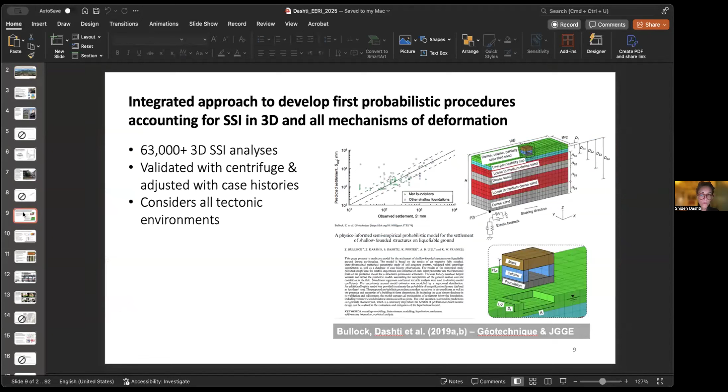Interesting, because when we tried it, it worked. Yeah, it seems it's an issue of the computer because it appears in presentation mode for a second and then goes back automatically. Is it the same right now? Yes, I think it's the same. But we can go like that. I think it shows in a good size as it is. Okay, so for me it's presentation mode. It's better for you to get out of presentation mode so that we see the same as you. Okay, so then that's going to be a problem because some of them are animated. Do you see things moving? No. Oh, wow. Okay.

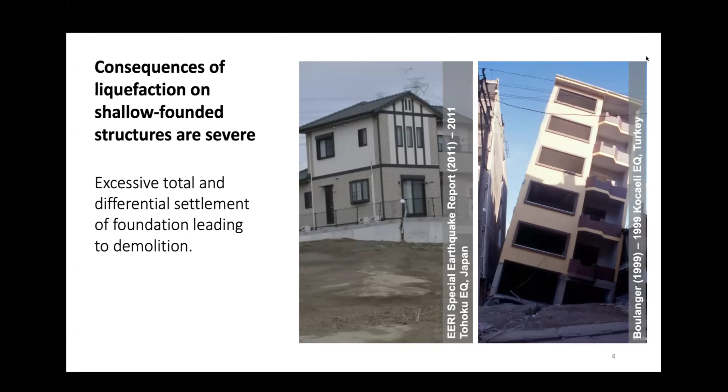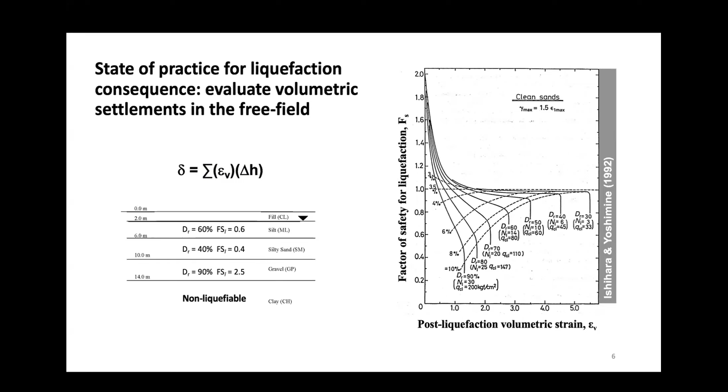Well, previous earthquakes have provided many examples of the damaging effects of soil liquefaction on the built environment, in particular in terms of excessive settlement or rotation of buildings on shallow foundations. The current state of practice for estimating the settlement of structures still relies heavily on empirical procedures that estimate volumetric deformations in individual layers and ignore the presence of the structure altogether. And they add up essentially the volumetric strains in different layers to get the final total surface settlement, ignoring the mechanisms that really exist below the structure under the influence of seismic soil structure interaction.

Next slide, please. So previous earthquakes have provided many examples of how these empirical volumetric strain-based procedures are unreliable and unconservative when estimating the settlement of the foundation, because they ignore seismic soil structure interaction and the mechanisms of deformation that are active below the foundation compared to the soil in the free field.

Next slide, please. And as a result, to address some of these gaps associated with building performance on liquefied soils, we in our team have developed the first probabilistic procedures for estimating both settlement and tilt or differential settlement, considering soil structure interaction or SSI in 3 dimensions, and all the mechanisms of deformation that are active, based on 63,000 3-dimensional soil structure interaction analyses. These analyses have been validated with centrifuge experiments and adjusted based on case histories, and they consider all the tectonic environments when combined with our ground motion prediction equations, which is a significant improvement to the previous procedures that were only considering free field conditions that I showed earlier.

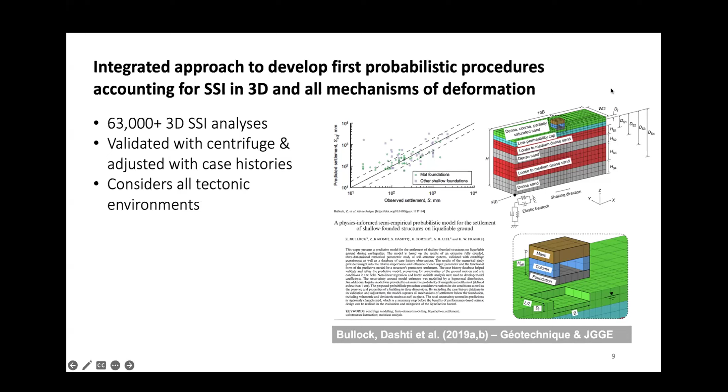Next slide, please. Now, these procedures have recently been extended to include triggering and mitigation as well. Next, considering new measures of demand and resistance, for example, cumulative absolute velocity, instead of surface PGA, that is mechanics-based and accounts for the degree of softening that we are interested in within the deposit.

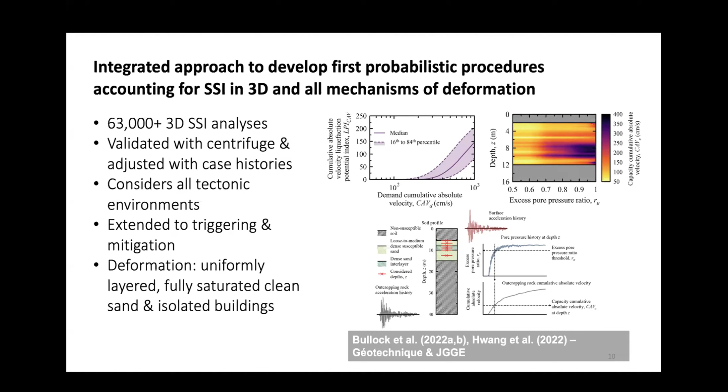Next, please. But there is one caveat to all of these procedures, and that is that they generally assume that we are dealing with uniformly layered, fully saturated deposits of clean sand, and that the buildings are essentially isolated. Next, please. So there are problems with both of these assumptions.

First, these analyses typically assume an idealized soil profile, like I've shown at the top right corner of the slide, which is really a big gross simplification of the reality, which is the bottom of the slide. That's what the actual soil profiles usually look like. Natural soil deposits are often highly stratified, and that stratification affects the extent and distribution of pore pressures and strains.

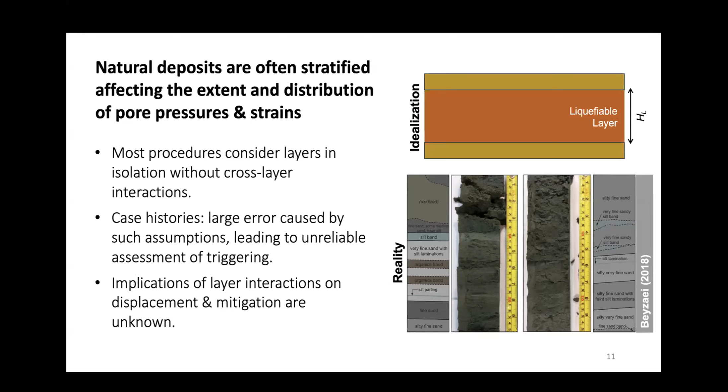And nevertheless, most of the procedures that we have available for liquefaction consider layers in isolation without accounting for cross-layer interactions, even though case histories, for example, after Christchurch in New Zealand, have shown a significant amount of error in our estimation of liquefaction triggering when we don't consider cross-layer interactions in stratigraphically variable deposits. But we don't know the implications of this problem in our procedures in terms of displacements or in terms of effectiveness of mitigation strategies. Next, please.

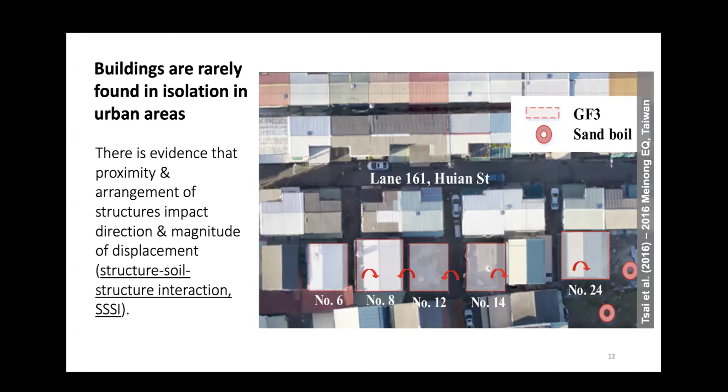On the second assumption, I mentioned our procedures, which are an important improvement to what we had before. They still assume that buildings are essentially isolated. But in reality, especially in urban areas, buildings are rarely found in isolation. We know, and there is plenty of evidence from case histories, that proximity and arrangement of structures impact the direction and magnitude of the displacement of the foundation due to what we refer to as structure-soil-structure interaction, or SSSI. Next, please.

Now, even though there is plenty of evidence that SSSI has a significant influence on the response, this problem hasn't been sufficiently studied on liquefiable soils, and therefore our existing procedures for liquefaction, for the most part, actually ignore SSSI, and definitely coupling between buildings is not considered in most of our design standards. Next.

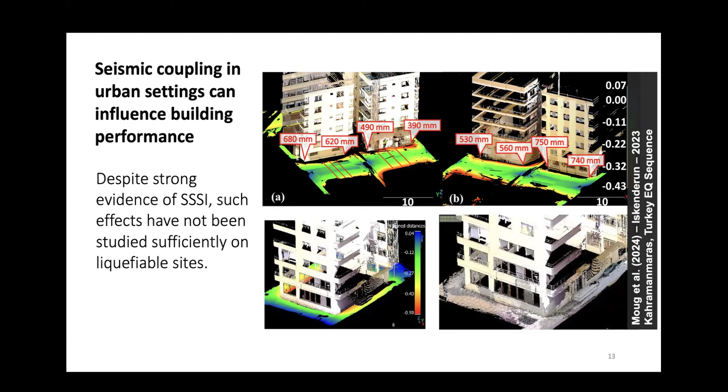So the last thing I want to mention about gaps is that we live in a changing climate, and that means more intense and more frequent climatic hazards like floods, wildfire, drought, and these extreme events cause fluctuations in the temperature, moisture, and flow. They affect the state of stress in our soils, and they therefore affect dynamic soil properties due to soil-atmosphere interactions.

And nevertheless, the impact of these fluctuations on soil liquefaction susceptibility, triggering, or consequence is understudied, especially in soils that are variable in their degree of saturation, and where these fluctuations can have a significant influence on the amount of suction, stress level, and dynamic properties. Next, please.

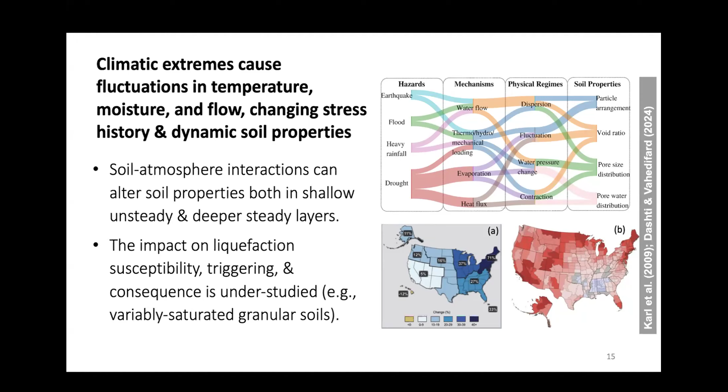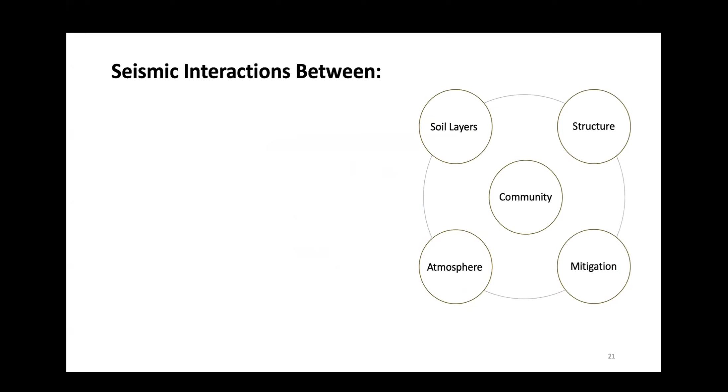So to address some of these problems, we use an integrated approach that includes field observations, physical modeling, constitutive modeling, and numerical modeling to study some of these interactions. Next slide, please. So I use this kind of integrated approach in our team to study interactions between soil layers and the structure, so that's soil-structure interaction, or between soil layers in stratigraphically variable deposits, or between structures through soil, or between mitigation strategy and the performance of the soil and structure system.

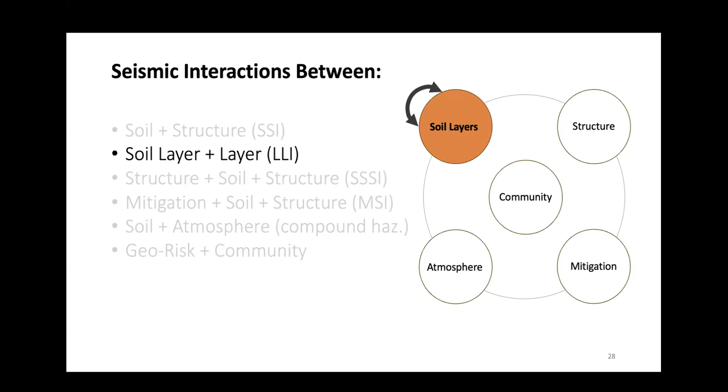We also study the interactions between soil layers and the atmosphere, for example, under compound climatic hazards, and the interaction among this whole system and their influence on various sectors of our community. In this presentation, I'm only going to focus on how different soil layers impact the performance of the structure, and how mitigation impacts the response of the system when we are dealing with realistically variable soil profiles with stratigraphic variability. Next.

Okay, next slide, please. So here is an outline of the presentation. I will first talk about the methodology, and then we'll take a small part of our simulations to look at how stratigraphic variability impacts the efficacy of liquefaction mitigation. And then we will talk about machine learning predictive models of performance.

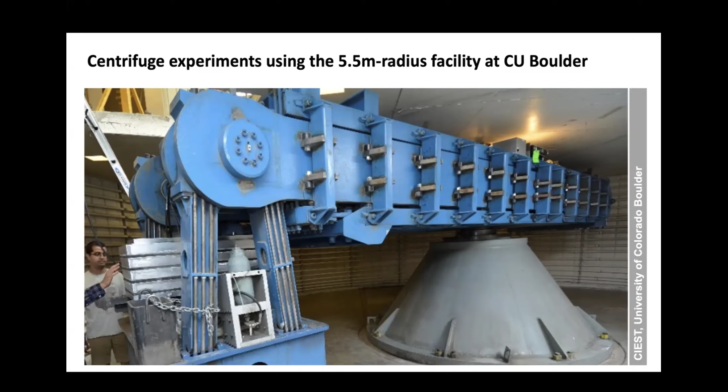Okay, so the next slide, we used the large centrifuge facility that we have available at the University of Colorado Boulder in the US, which has a radius of about 5.5 meters. And here we have the opportunity to build many models, scaled models of soil structure systems, and study this phenomenon physically with variations in the soil profile, structure, and ground motion so that we can calibrate and validate our numerical models accordingly. Next slide.

So we performed a large number of experiments, but here I'm showing the schematic drawing of a few of them where we had a layered liquefiable soil profile. In the middle, typically a deposit of loose, clean sand. Sometimes we added a thin silt capping layer above that critical layer. In some of the tests, we had no structure, no mitigation. Sometimes we introduced a form of mitigation.

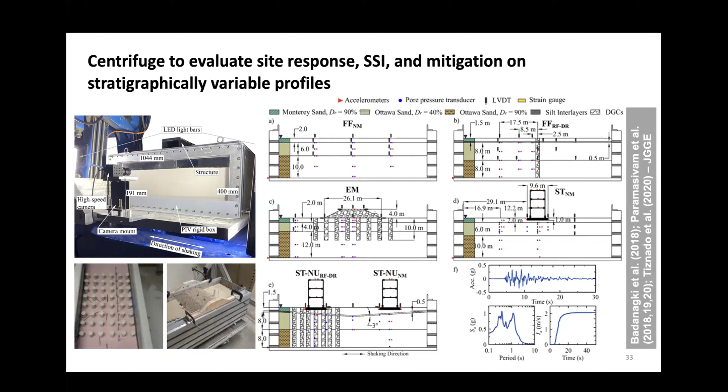Here in this slide, I'm only showing one form of mitigation, that is dense granular columns, or DGCs, which I will be using throughout the presentation for dense granular columns. And then some of the experiments had an isolated form of a building or a geotechnical structure like an embankment. Sometimes we also varied the thickness of the liquefiable layer to see the effects of that variation on the performance of the system. Next slide, please.

Here are pictures of two structures that were typically used in these experiments. Structure A, the shorter structure, represents a 3-story building, and building B represents a 9-story building on a 1-story basement foundation. And these structures were designed with inelastic fuses, so they are capable of inelastic deformations, damage, and collapse. But they were designed for different seismicity levels in the state of California in a shallow crustal earthquake tectonic environment.

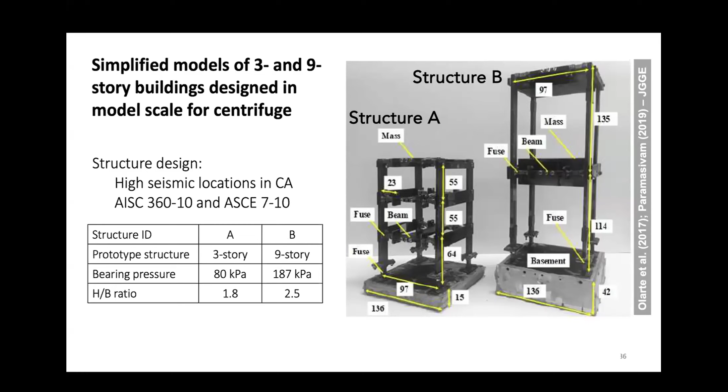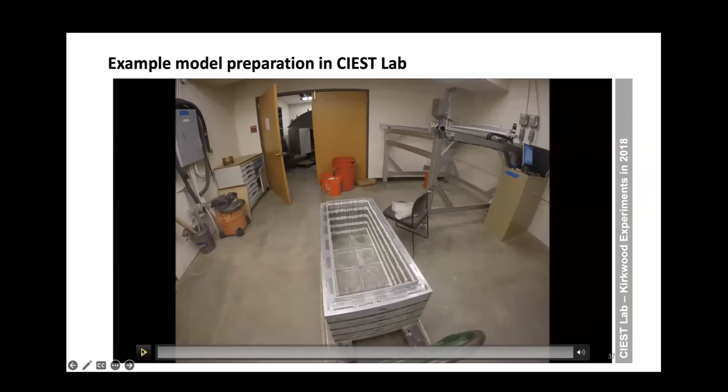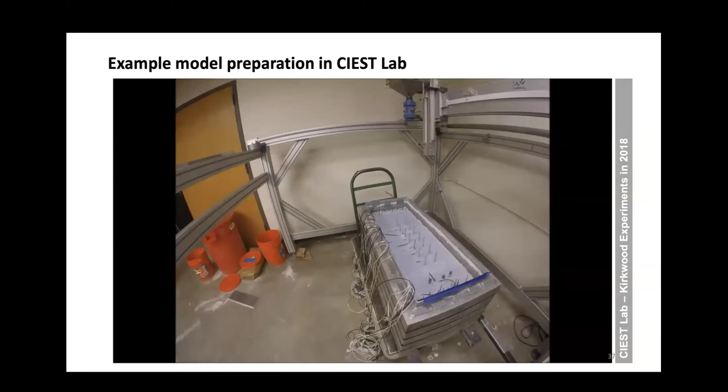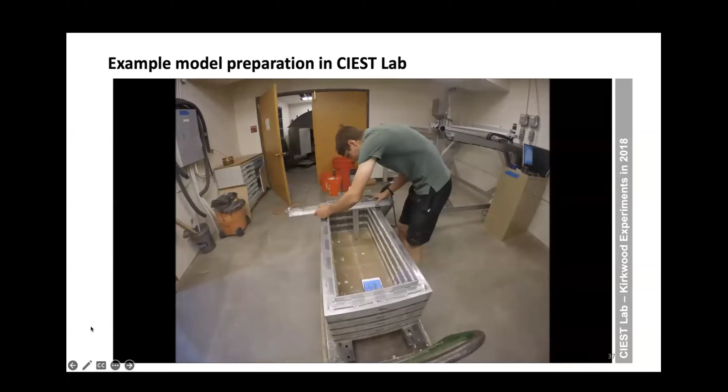Next slide, please. And here is a time-lapse video showing essentially how some of these model experiments were prepared. If the video plays, yeah, there's a time-lapse, so it goes really fast. It gives you an idea for the size of the container that was used in the centrifuge. We had an automated pluviator that was calibrated to achieve a certain relative density for dry pluviation of the sand layers in this case. Then we placed sensors at their designated locations and the structures, and then prepared the model to take it to the centrifuge, where the model was saturated and then spun up in the centrifuge, and then we applied the ground motion.

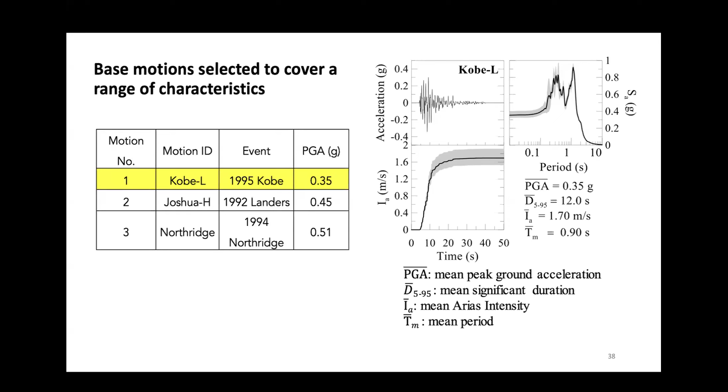Next slide, please. So in the next slide, I'm showing some of the properties of a sequence of ground motions. These properties are shown in prototype scale units, but in the centrifuge, in model scale, everything is different because of the scaling laws. Accelerations are, in this case, 75 times more, are scaled up in the centrifuge, and the time is scaled down. So everything is more intense and in a shorter duration in the centrifuge. But here I'm showing in prototype scale units one of the main acceleration demands as a horizontal component of a broadband signal during the Kobe earthquake at the Port Island station.

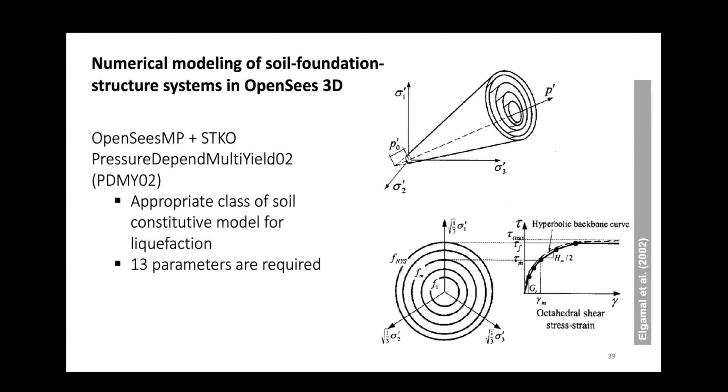Now, in parallel to the centrifuge experiments, we performed numerical simulations. We used 3 different types of constitutive models that are appropriate for capturing soil response when it liquefies. Here I'm showing only one of the models, a pressure-dependent multi-yield surface soil constitutive model. This model has many parameters that were calibrated. Next slide, please. Using a sequence of monotonic and cyclic triaxial tests that we performed in our lab. Next slide.

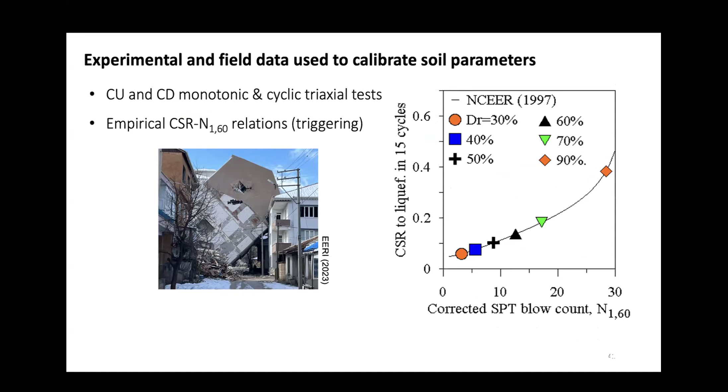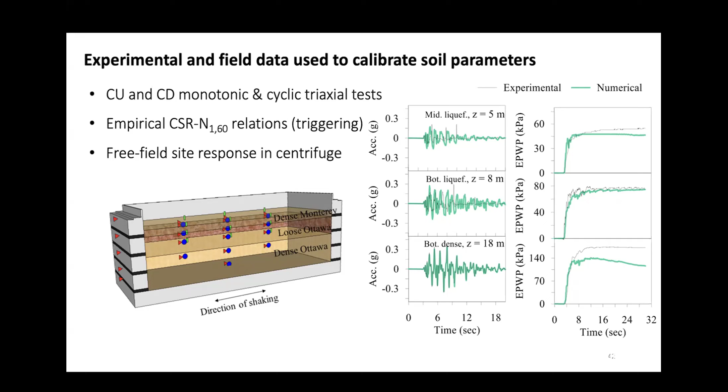In addition to empirical data on number of cycles to liquefaction, we also used one centrifuge experiment, next slide, where we had no building present and no mitigation, but we had a boundary value problem that could be used for calibrating the properties of our soil profiles under the expected confining pressures and drainage and the ground motion that we expected later in more complicated soil conditions. Then after calibration, we modeled the entire system, the soil foundation structure system, with or without mitigation.

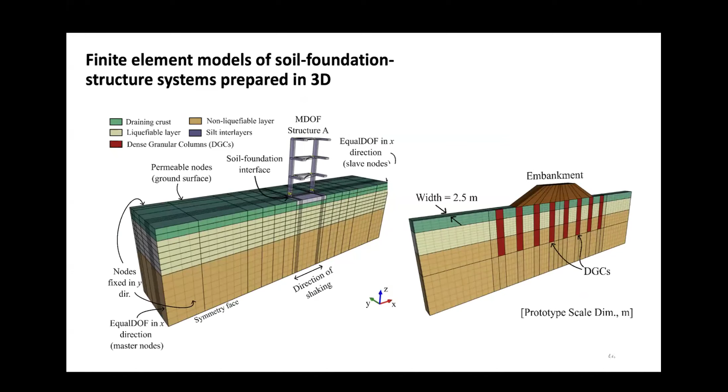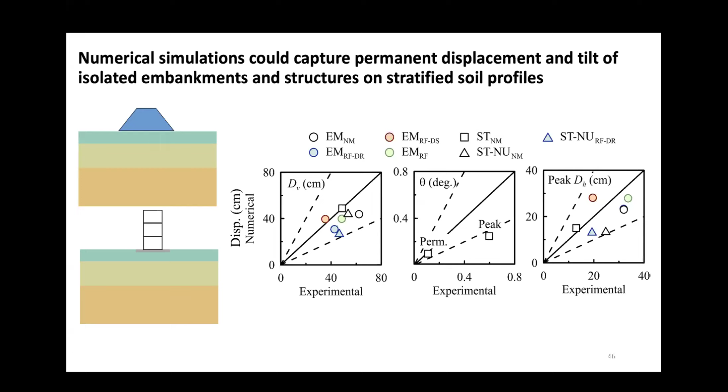Next slide. And we started to compare the results for our models with a structure or with an embankment, different kinds of mitigation or mitigation properties. And here in the next slide, I'm showing a summary of some of these comparisons in terms of vertical displacement or horizontal displacement and tilt. Overall, we were able to capture these trends well. In the next slide, there are more details in terms of the excess pore pressure time histories, settlement, tilt, or acceleration response spectra. There's not enough time to cover all of that, but it's in our publications, which I will cite at the end.

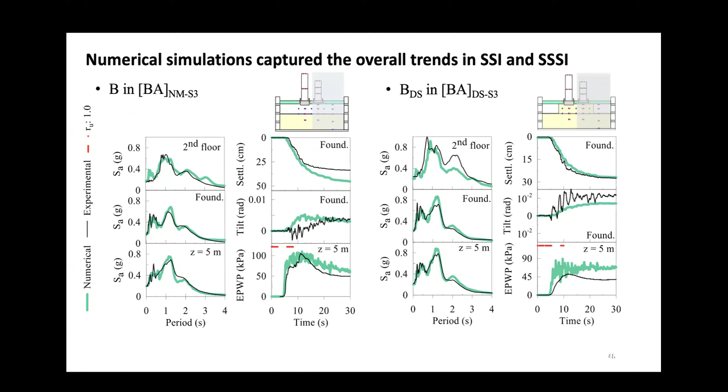All of these details are provided in the publications. Next slide, please. So after this initial exercise of understanding the mechanics and using the physical models to calibrate and validate our numerical tool, we took this numerical model and performed a limited sensitivity study to see how important is stratigraphic variability in terms of building performance on liquefiable soils and in terms of efficacy of mitigation.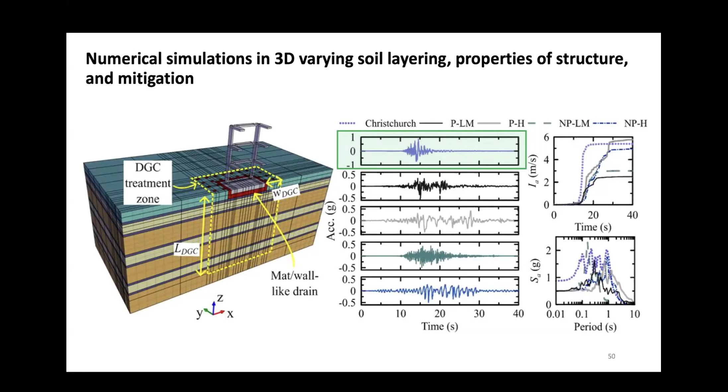So here I'm showing the results from this limited sensitivity study. That's just numerical models that were previously validated. I will only show the results for this one motion, just so that we can better see the trends. Now, in the next slide, I will show a few different soil models where we sequentially make the profile more complicated. So in model 1, on the left, we have a uniformly layered deposit of essentially clean sand.

The critical layer is in the middle. That's a loose, saturated, clean sand deposit, and it's sandwiched between two denser sand layers that are not going to liquefy, but they also don't introduce much of a variation in permeability. In the second model, we introduce one thin silt layer above that critical liquefiable layer. In the third model on the right, we introduce multiple silt interlayers. So that's essentially dividing up the continuity of the critical liquefiable layer.

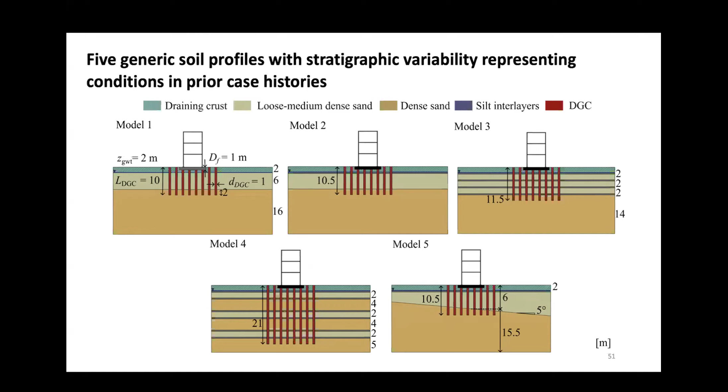In the fourth model, we take each of those critical layers and spread them out along the profile. In the fifth model, we vary the thickness of the critical layer. And all of these simulations were done with building A, that's the 3-story building on a mat foundation, and building B, that is a 9-story building on a basement foundation. And all of them run first with no mitigation, and then with DGCs or dense granular columns in different forms.

So these DGCs, we have the baseline case with an area replacement ratio of 10%. Then we look at the influence of area replacement ratio by increasing it to 20%. We vary the stiffness ratio. We look at the possibility of clogging. What if it doesn't drain? What is the effect on the system?

We also look at how densifying the soil around the DGCs, which could happen, depending on the soil type, depending on the energy of compaction of the DGCs during installation, we could get densification. How does that mechanism combined with drainage affect the performance? So we looked at these variations in our sensitivity study. Next slide.

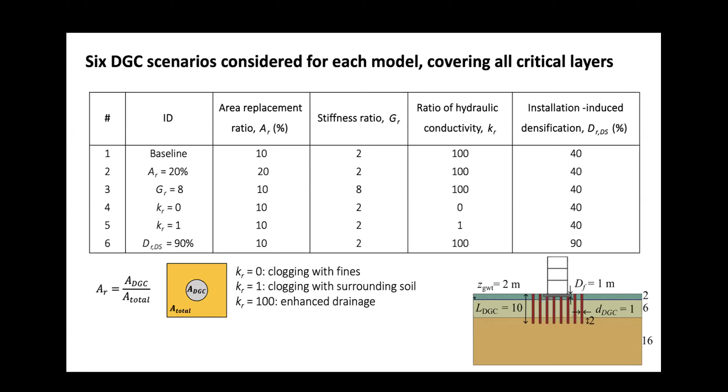And then now we can look at how for each of these profiles, the performance changed. And here I'm only, for the interest of time, showing performance in terms of permanent average settlement of the foundation for the two structures in question, A and B. So at the bottom, I'm showing the average settlement of the foundation when not mitigated. In the middle, showing the permanent settlement when mitigated with DGCs. And at the top is the ratio of DGC mitigated to non-mitigated.

And so the top one is essentially a result showing the efficacy of mitigation. How effective is it? And the lower, the better, because a lower ratio means we've been very successful at reducing the settlement of the building through mitigation. So as we go from profile 1 to 2, depending on the structure, we see an increase in foundation settlement because the silt increased the generation of excess pore pressures.

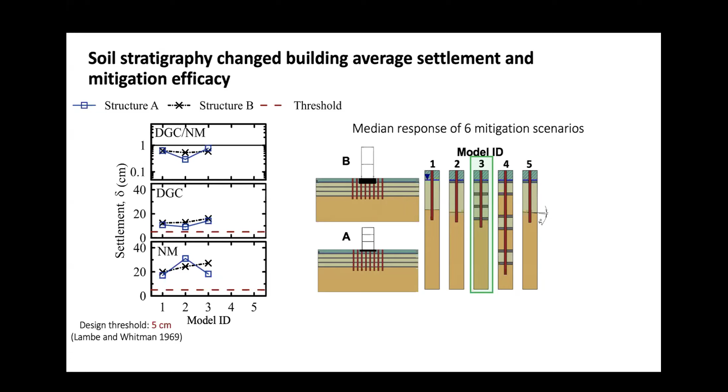But as we go from 2 to 3, the addition of silt interlayers, depending on the building structure, could actually reduce the settlement of the non-mitigated structure by breaking up the continuity of the layer. But in this case, the DGCs were not very effective. Now, in the fourth model, we see a really poor performance from the DGCs. If you look at the top plot, the normalized value is above 1. That means mitigation amplified the settlement of the foundation.

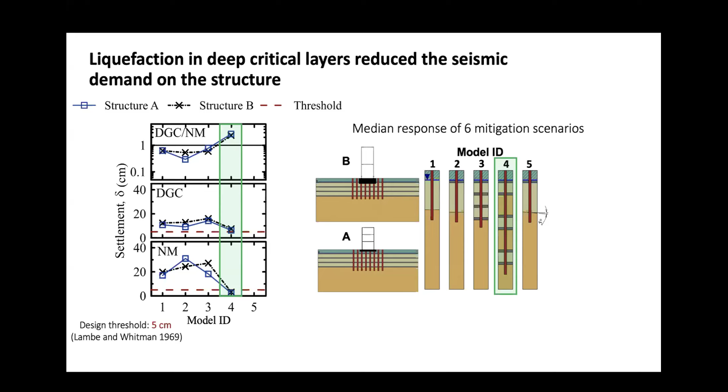But to be fair, if we look at the response of the non-mitigated model, it's very small settlement in the non-normalized value. It's very small. And even the mitigated value, even though it's increased a little, it's still very small. It's within the design limit. So let's see what actually happened during this case.

The next slide, I'm showing the excess pore pressure and shear strain contours. So this is a case where we have a thin liquefiable layer at depth. And the presence of that thin layer is essentially creating low... and is essentially base isolating the layers closer to the foundation, in the vicinity of the foundation.

And that is reducing the accumulation of shear strains in the vicinity of the foundation and is reducing the deformations. When we add DGCs, so the animations to the right, that's a case where the presence of DGCs are essentially redistributing the excess pore pressures and shear strains within the denser layers a little bit. And that is increasing the settlement of the foundation a little bit. But it's still within the design limits, and this is not something to worry about.

But this is one case where I would have said, perhaps mitigation was not necessary. This is a case where we are getting sufficient base isolation because of the liquefaction at depth. And perhaps this is a case where we wouldn't have needed to invest in installing DGCs to help the building, at least in terms of the performance related to settlement.

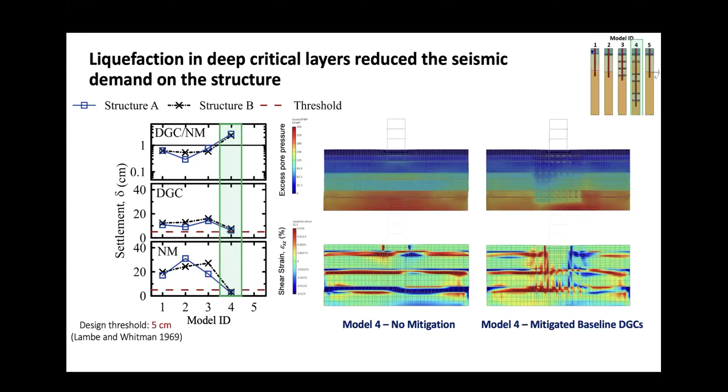Next slide, please. Now, when we go to the last profile, this is a case where the thickness of the critical layer is variable. And we see that has led to accumulation of asymmetric deformations below the foundation. And that increased the settlement and especially the differential settlement of this building. However, DGCs here were successful at limiting those deformations in the profile.

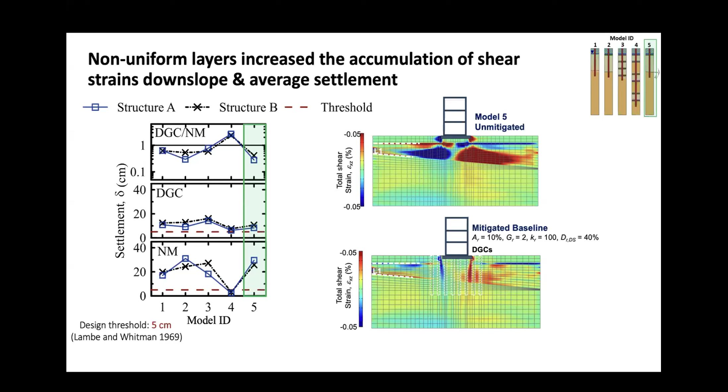Next slide. So I will also just quickly show how the different properties of DGCs affected the mitigation efficacy in terms of the ratio of DGC to non-mitigated settlement. So this is the baseline case. Then when we consider clogging with the permeability ratios of 0 or 1, that's a case where we see really poor performance from mitigation. This shows that drainage is a very important factor in reducing settlement.

Then later, when we add area replacement ratio, we improved the performance. With stiffness ratio for this particular condition, things didn't improve that much in terms of settlement. But the best performance here was when densification was combined with drainage. So all of these results are detailed in our recent publication in the Journal of Geotechnical and Geoenvironmental Engineering, ASCE.

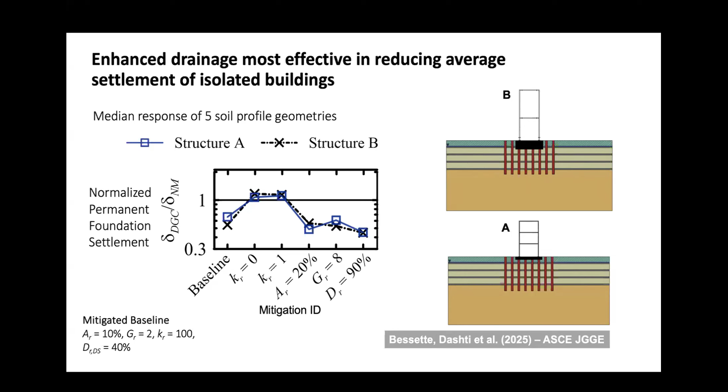And we didn't only compare settlements here. I only showed settlement, but we also compared the performance and the impact of these variables on tilt of the building, as well as acceleration demand within the superstructure. And all of those are discussed within this paper, which I refer you to. But I'll move on so that we have some time to talk about predictive models.

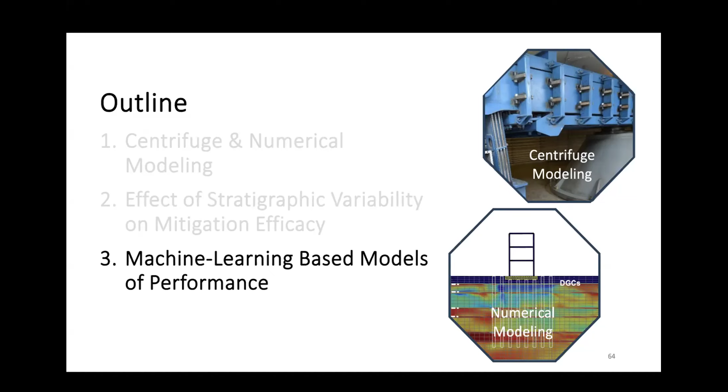Okay. So now, after this initial calibration and validation, and this initial sensitivity study to get a sense for how important is stratigraphic variability, we now had an opportunity to take these numerical models and simulate more realistic conditions. Now we could vary the profiles quite a bit, introduce multiple silt and clay layers, interlayers, vary the thickness and continuity of our layers, vary the properties of the foundation, have more realistic structures, and see if we can generate the database that is required for predictive models of performance and predictive models for mitigating this hazard.

Next slide, please. So this is the parametric study that was initiated last year, where we sampled the input parameters using quasi-Monte Carlo sampling that led to more than 19,000 single soil column simulations for nonlinear site response analysis, as well as 4,000 three-dimensional soil structure interaction simulations, all in OpenSees. And in all of these simulations, we monitored accelerations as well as shear deformations and excess pore pressures, ejecta, deformations, with the goal of improving predictive models.

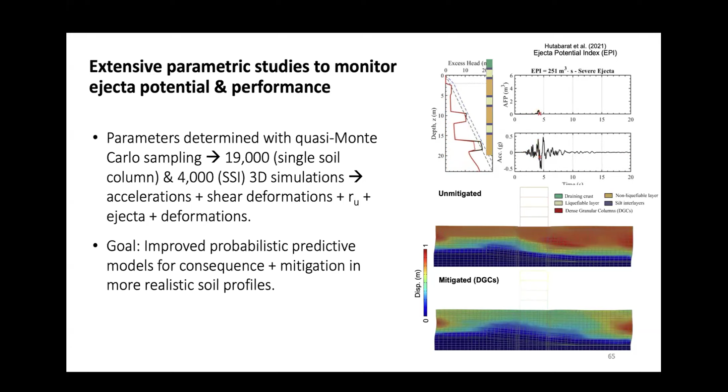Next slide, please. So this is showing the input parameters that were varied in terms of the soil profile itself and the stratigraphic variability in the soil types and configurations geometry that was considered, the properties of mitigation in terms of the DGC properties within the range that we expect in the field, of course, ground motion properties, as well as the foundation and the structure. For structure, we considered a range of reinforced concrete, steel, and wood frame buildings that are commonly built in seismically active areas of the United States.

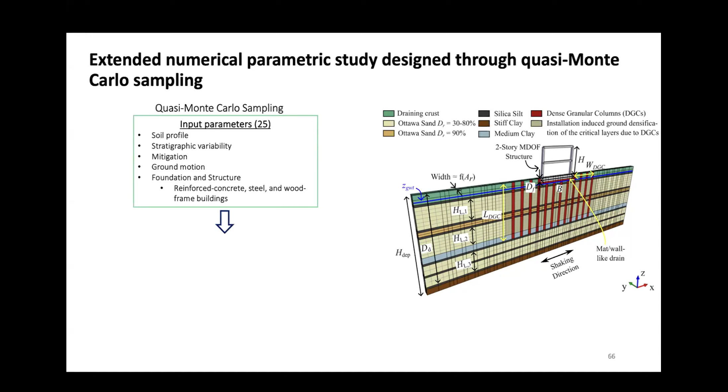And then that led to 100 different model configurations. And we selected, using quasi-Monte Carlo sampling, 21 ground motions for each model configuration that was randomly selected. And for each configuration, we had one simulation with no mitigation and one with DGCs. That led to more than 4,000 SSI simulations that were performed in the finite element platform OpenSees.

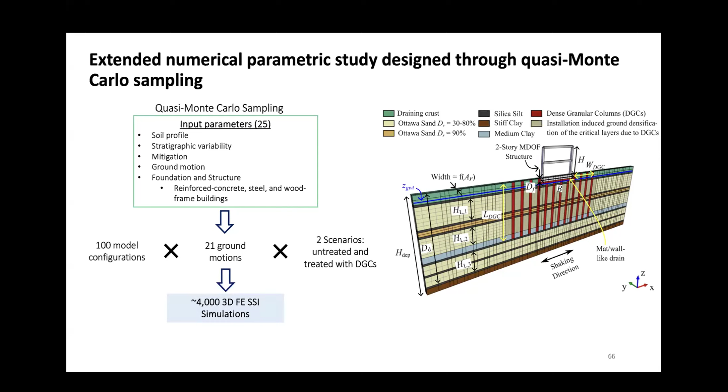Next slide. So just to put things in context, I have included the three major papers that we published in our team, providing predictive models of performance, each of them for different problems. For example, on the left, Bullock et al. 2019, we provided predictive models for foundation settlement on liquefiable soils, but these were generally uniform and uniformly layered deposits of primarily clean sand.

The second model, Tiznado et al., provides models of liquefaction triggering in free field conditions, but near dense granular columns. And on the right, Hwang et al. 2022 provides models of foundation settlement on densified soils. All of these models used a simple form of machine learning called the lasso that is very close to a classical regression.

To essentially find a functional form for predicting the demand parameter in question, like settlement or pore pressure, and so on. Using this kind of simple technique, like a classical regression, has a lot of advantages. For example, we see the functional form and we can make sense of it as engineers.

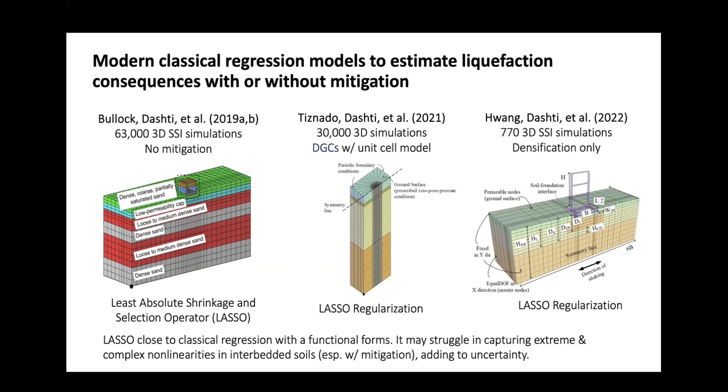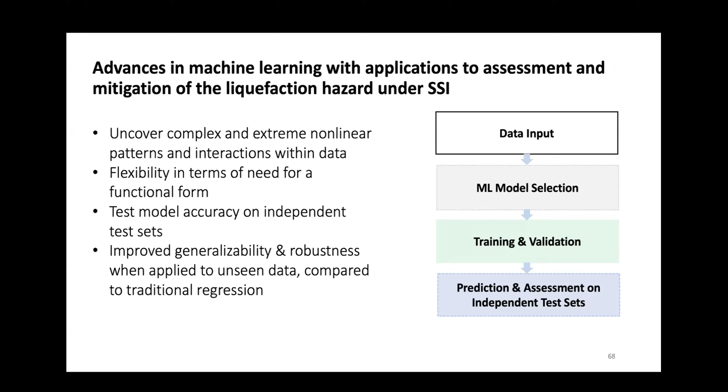So there are innovations, advances in machine learning that have applications to this kind of problem. There are ways to uncover complex and extreme nonlinearity in the patterns. There are models that have flexibility in terms of the need for a functional form, and they can let us test model accuracy on independent test sets, and this will help improve generalizability and robustness. And among the different options available, we selected the random forest model. Go to next slide, please.

The random forest algorithm has the advantage of combining interpretability, accuracy, and efficiency. Now, this is not perfect, and if there is time, we can later discuss the problems with random forest. But some of the advantages here are that it reduces the risk of overfitting the data. It has a feature importance analysis tool. It's great at capturing extreme nonlinearities and interdependencies in the data set. And it has added features that help us better visualize and interpret the results, and that can inform our design and mitigation models very well.

So what is this random forest model? It's essentially an ensemble model that is built from multiple decision trees, and each tree learns patterns from a subset of the data. And then at the end, predictions are averaged to provide a final result. That's essentially the essence of random forest.

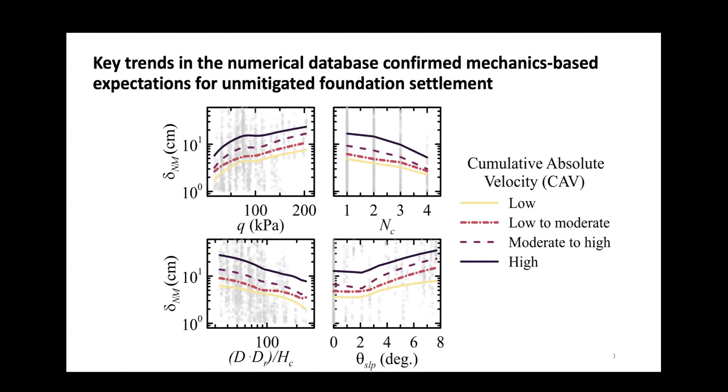Next slide. After which, we developed essentially 4 different predictive models for 2 scenarios of unmitigated settlement and then the ratio of mitigated to unmitigated settlement. And we considered 2 different models, first combining reinforced concrete and steel frame structures together, and separately for wood frame structures that had very different characteristics. And this helped us better manage the models and reduce the uncertainty.

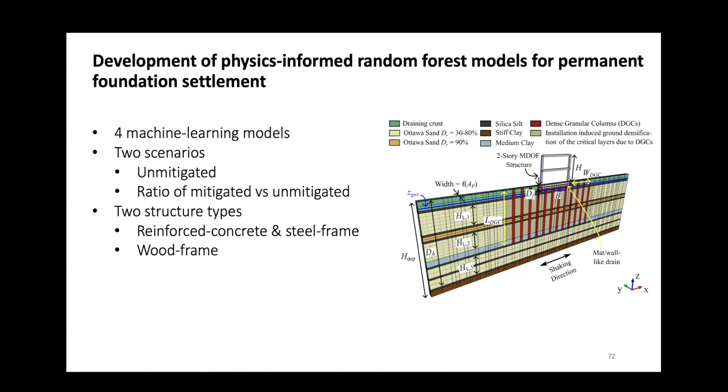Next. So during this process, we had to feed the random forest with features. And so we started with 300 input features that made sense mechanistically, but we really didn't know which one would be most important. And no engineer wants a model where they would have to enter 300 input parameters. So we had to narrow things down. This was later refined based on simplicity and practicality.

We looked at which features were most important according to random forest's ranking mechanism. And we made sure that they were physics informed and they followed trends from mechanics. And we could check the predictive accuracy on the test sets by essentially removing an input feature and seeing what the effect is.

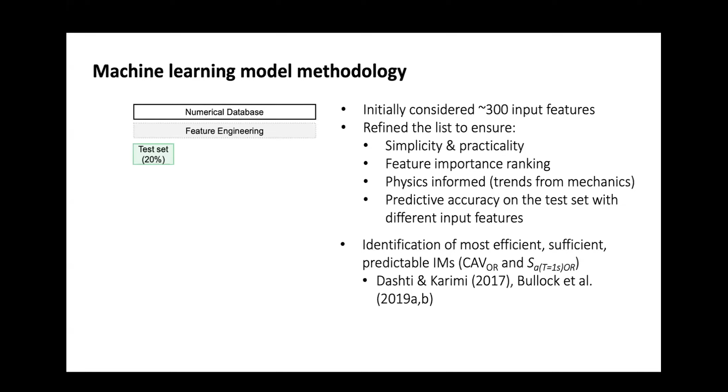In all of these cases, we always also have to feed the machine learning algorithm with what is an optimum intensity measure. And I won't take your time with that. We have published plenty on this topic before, and I can come back to it if there are questions.

But essentially, we gave the two most optimum intensity measures that were cumulative absolute velocity and spectral acceleration at a period of 1 second to the algorithm. And it used 20% of the data as test set. 80% of the numerical data was used as training set, and it iterated to come up with the best model.

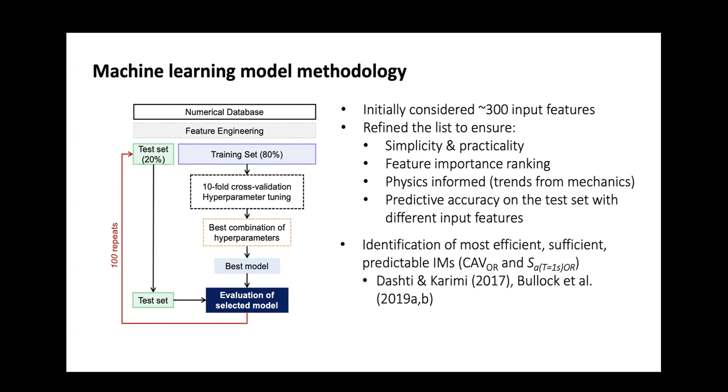One more thing, the process was repeated 100 times to come up with the best model. And in this iteration, it used the test set to keep checking for the accuracy of the predictions. So now, after we had these final models, we compared the results.

The predictions on the left are showing for the settlement of non-mitigated structure, and at the bottom, DGC settlement to non-mitigated. So on the left with the blue circles, you see this is the results of predicted from machine learning versus observed or the numerical data. So those comparisons are really good, but the real test is for the plot on the right. That's the testing set that was not used in the training of the model. And you see that the comparisons are still decent.

The table shows more of the statistics in terms of R-squared, standard deviation, or RMSE, that are still showing reasonable comparisons and uncertainty in the predictions in terms of the testing set or testing data.

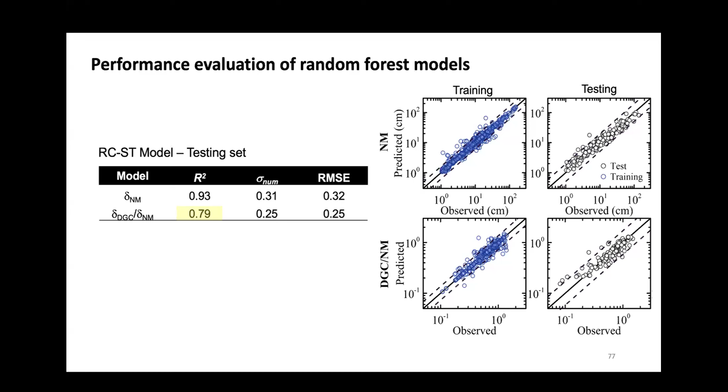Next slide. So here I'm showing a comparison of the uncertainty in our model with what is out there. So on the top is again standard deviation from our random forest model for settlement of unmitigated structures. I can only compare with settlement of unmitigated structures because there's no other model in the past with mitigation. And then the second row, I'm showing, if we had used the lasso instead, the standard deviation would have increased to 0.91. So this is for natural log of settlement. So it has a big effect.

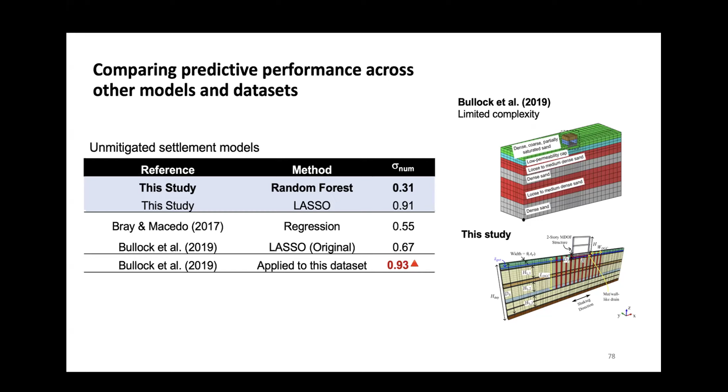And Bray and Macedo's model for settlement that used the classical regression. Our own model in the past, Bullock et al., that used lasso, you see 0.67. Now, if we use the Bullock et al. model with our new data that now has stratigraphic variability in the profile, you would see a major increase in standard deviation. Next slide.

Okay, so I would just go through this quickly. I wanted to show that this is one of the features of random forest that allows us to interpret the physical relationship between the input features and the final prediction of settlement. These SHAP values essentially give us a sense for how each input parameter contributes to the calculated settlement. For example, from the top to bottom of this plot, it shows them in terms of order of importance. So CAV, or cumulative absolute velocity of the ground motion, had the highest importance. It has the highest influence on settlement predictions.

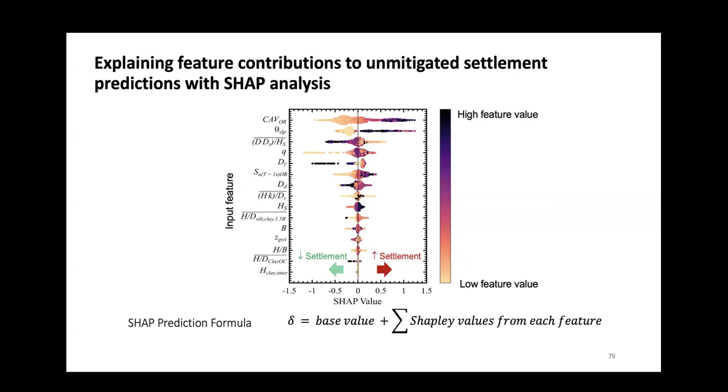And then after that, we have the slope of the critical layer, or the product of depth, relative density normalized by the thickness of sand layers, and so on. So we can see how important they each are and what's the polarity of their influence. Does their increase increase settlement or decrease settlement? And that's a useful feature for us to make sure that the patterns and the input features in the machine learning tool make physical sense. Next slide.

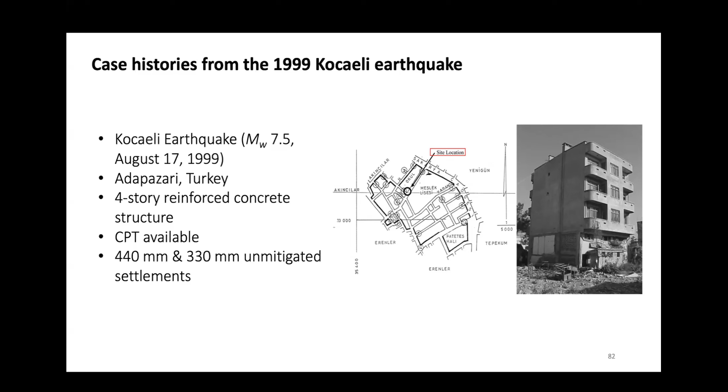Okay, so the last step was to validate against case histories, and we were only able to find a very limited number of case histories that had CPT recordings available near building structures, and where we had reliable data. This is one case from the 99 Kocaeli earthquake. Next slide, please, where we had CPT recordings and the properties of the building present. We digitized the CPT traces and got the input features and went on to our machine learning based predictive model for settlement. We couldn't find anything with mitigation, so this is just comparing with the unmitigated settlement model.

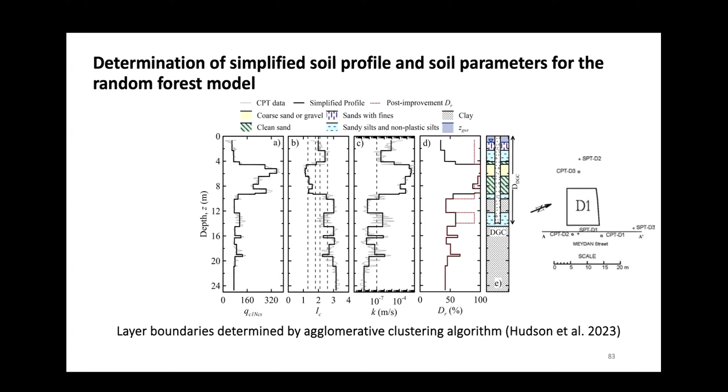So this is great. I mean, we are doing a little better than before now that we include stratigraphic variability in the profile and our calculations. But it's not enough for us to say for sure that we're doing better. This is not statistically significant. These are just two case histories, and it's certainly not enough to make any kind of statement.

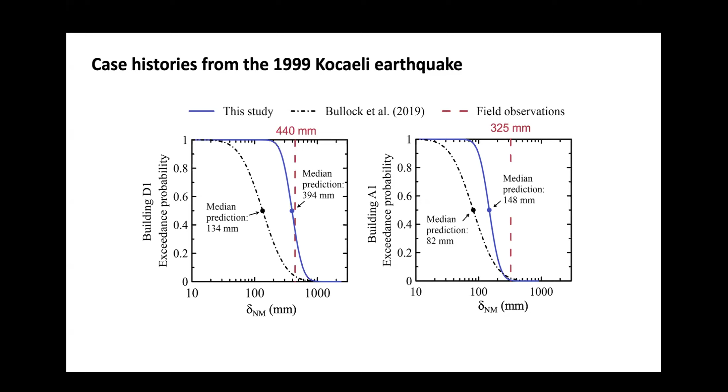We need more case histories, and that is needed in the future to be able to truly validate. And I will end by saying that the models that I showed today were only based on settlement. Next slide. And in our papers, we also show predictions of foundation permanent rotation.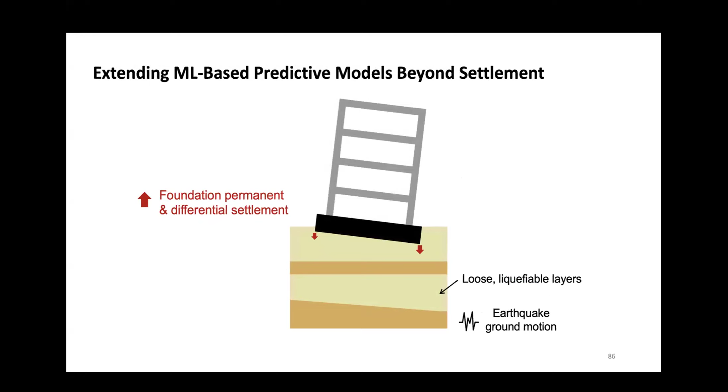But one important thing that happens, next slide, when we add mitigation is that settlement and differential settlement reduce, but accelerations amplify. And that can lead to damage in the superstructure. So in our new models, we are trying to provide recommendations for how acceleration on the foundation and the drift in the superstructure change, so that structural engineers can plan for it, and we don't ignore this increased demand in our retrofit of the buildings or in our design of the superstructure for structural engineers.

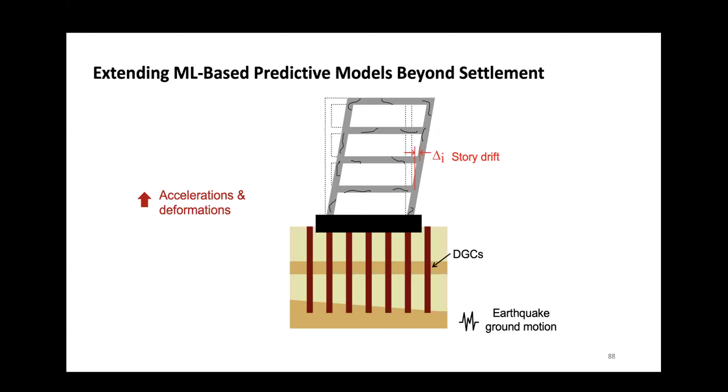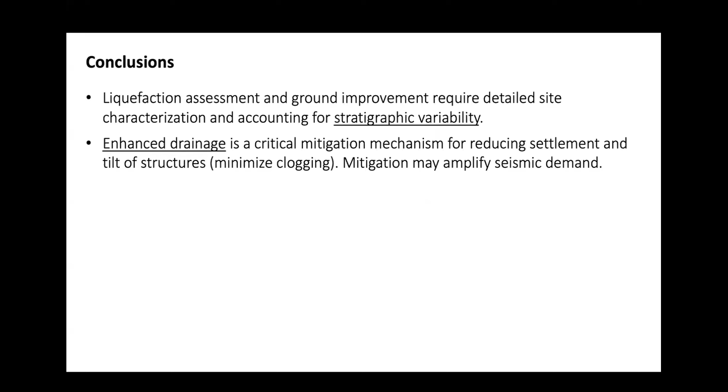Okay, so in conclusion, I showed that liquefaction assessment and ground improvement require detailed site characterization, in particular with high quality CPTs, to account for stratigraphic variability in the profile. I also showed that enhanced drainage seems to be a critical mechanism of mitigation for reducing both the permanent and differential settlement of the structure. And it's critical that we do what we can to minimize the likelihood of clogging in the field. At the same time, mitigation can amplify seismic demand, and we need to account for that in design.

Now, the essence of this talk was to show that combining well-calibrated numerical simulations with physical experiments with innovations in machine learning can enable a new paradigm in mitigating geohazards through practical and accurate methods that account for highly nonlinear soil profiles and interactions in realistic sites and for realistic structures.

Now, I will provide reference for different papers that have predictive models for ejecta potential, settlement, and tilt, and additional papers are coming out this year with more design guidelines for structural engineers related to acceleration demand in the structure after we mitigate the hazard. And there is clearly need for additional case histories with CPT recordings near structures, particularly when mitigation is involved, so that we can validate and improve these procedures.